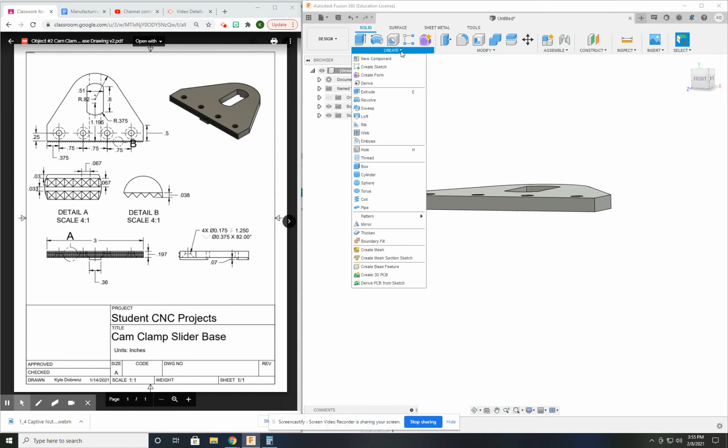I'm going to sketch on the surface and make a box. The size of that box is going to be 0.067 wide and 0.067 in length, or however you want to look at it. I'm just going to use the equals sign because that's easier.

Now I need to do an offset work plane, and it's going to be offset by essentially the height of the pyramid. The height of the pyramid is 0.038. Make sure that's going the right direction.

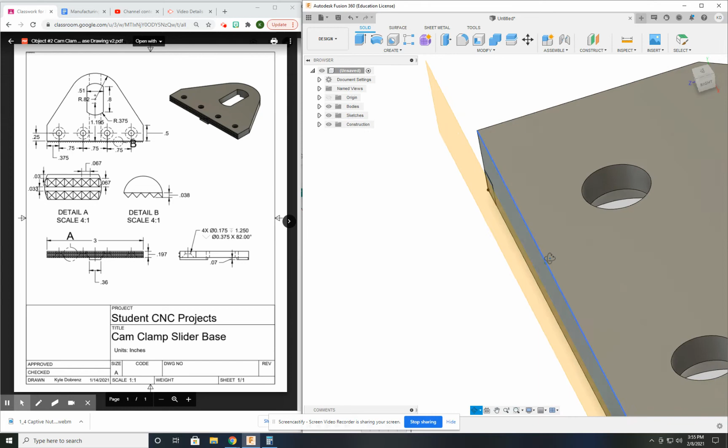Good, now I'm going to sketch on this plane I just created. I'm going to use my project tool to essentially import that geometry from the last sketch. Highlight it all, hit OK, and now it's in my current sketch.

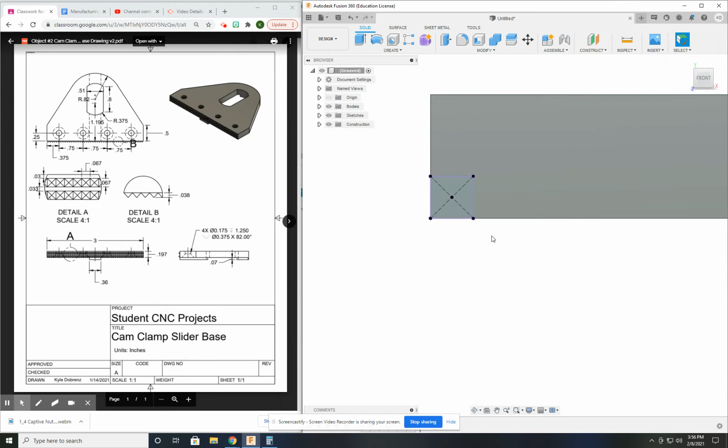I like to use diagonal lines, I'm a big fan of construction lines. Those diagonal lines show me exactly where the center point is. I'm going to put a point right there, and that point's going to be the only thing that we see in that sketch. So finish that sketch, and now I have two sketches here: this base sketch and this one.

I'm going to grab the loft tool, select my first sketch, and then select just the point in my second sketch, and I should see this neat and tidy little pyramid there. Click OK, and I have my first pyramid. Now I've got to make a lot more.

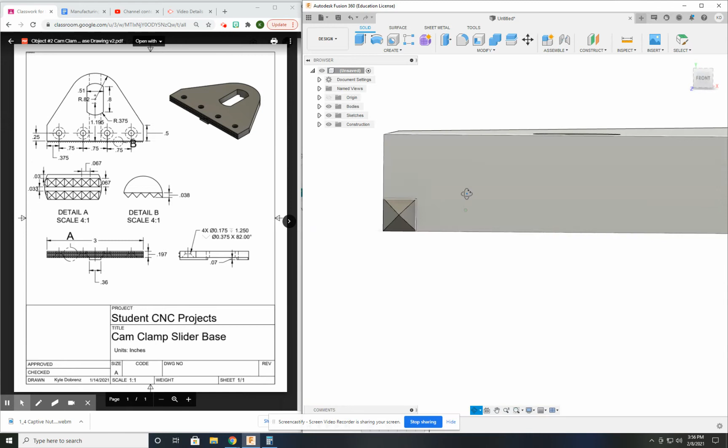I'm going to use the rectangular pattern tool, and I recommend you use features -- a lot less problems with processing when you use features. Then go down to the timeline and select that loft I made. That's the easiest way, in my opinion, to get those features.

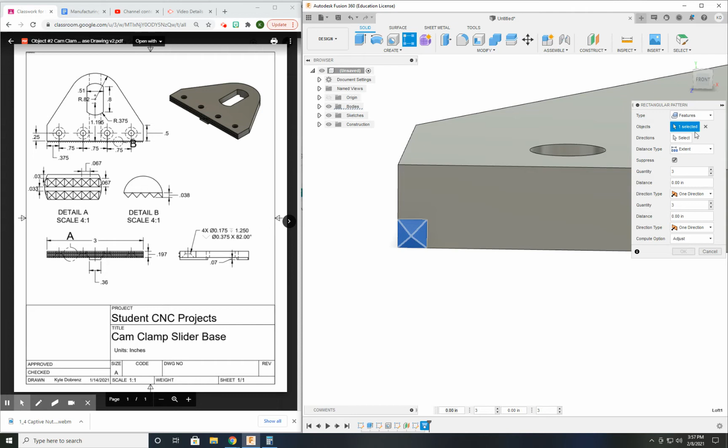Select my direction, I'm going to go that way. Let's see if I can get both directions going. Sometimes, for whatever reason, I don't know if it's a Fusion thing, but I can only get one direction to work properly. If I can get them both, we can do all of them in one step. If I can only get one direction, I'll do the horizontal and then come back with another linear pattern and do a pattern of the pattern -- copy of a copy. It all depends.

All right, so direction 1 -- I believe the number is 45, but what I'm looking for is no gaps between them.

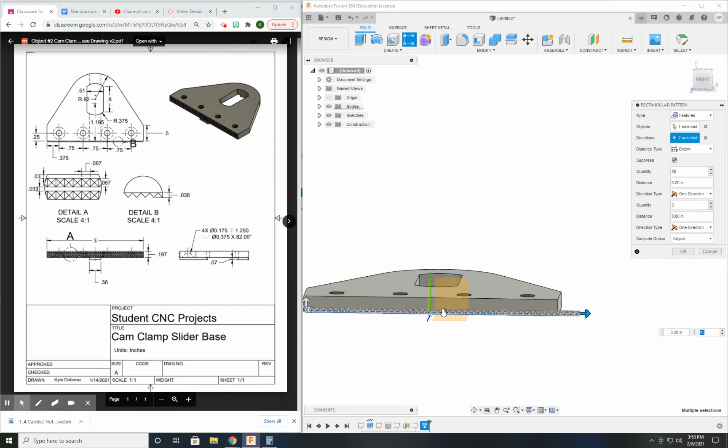Now what I put in here is the number 45, that's the quantity I have. What I'm looking for is I want the pyramids to go all the way to the edge, but without overlapping each other. So I know the width of this object is 3 inches, but I have to account for the one pyramid I've created, so if I put in 3 minus the width of the pyramid, 0.067, it should take me all the way to the edge.

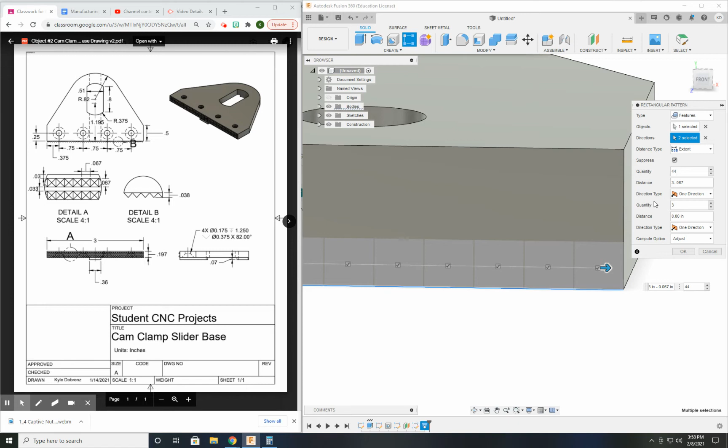I can play with numbers. If I don't know how many, I can start with 40. There's a gap there. What about 41? Still a gap. Work my way - 44, there's hardly a gap. That might be okay, but what about 45? Oh, looks perfect. I'm going to go with 45. And I just happen to know those numbers because I created the object, but who's counting?

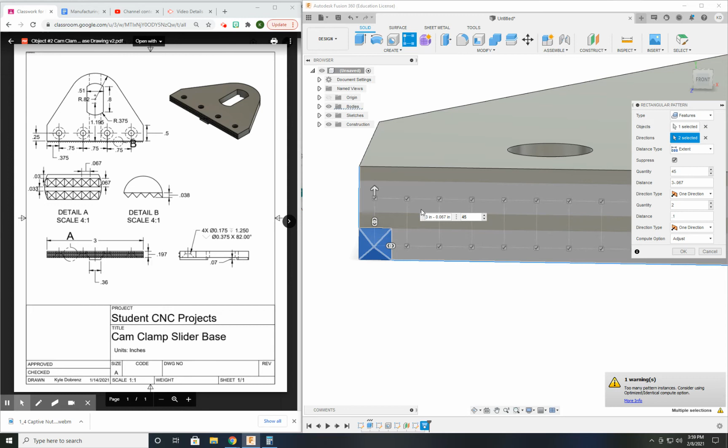It's all about using the information that we're given. Okay, now if I look here, the second row, which I think I'm going to be able to do both directions at once, the second row has a gap of 0.033, and I know that the height of this is 0.067. Add them together and you get 0.1. So let's see what 0.1 does. Looks good, except there are too many. I have 3 rows, I only need 2. That looks perfect. All right, let's see if this computer will do it.

I'm getting a warning here, too much stuff going on, but let's try it. Hey, that looks right about perfect. Very happy with that - no gaps in between, while no overlap or no discernible overlap. That's going to grip some wood, that's for sure.

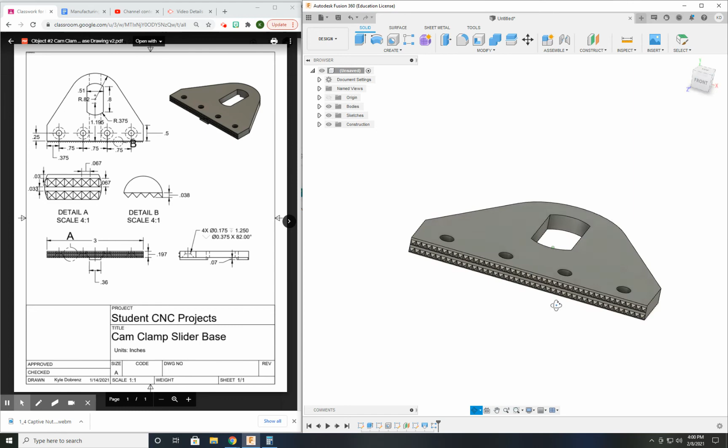All right, so that's your linear pattern tool. Now, like I said, sometimes if you can only create one row, then that's fine. You can do a second pattern tool, and when you select features, click both of these because you want the first box and the other 44 in your pattern, and you just do it a little higher. But it's great when everything works right and you can get them in one.

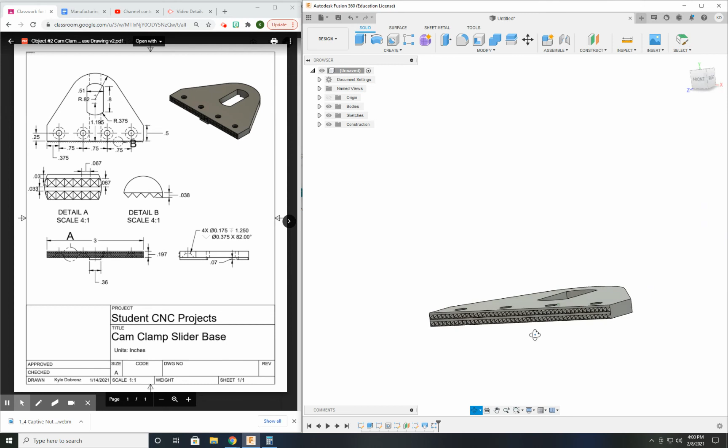All right, the last thing I have to do is create this spline type of thing right here. So let's do another sketch on the bottom. And if I look here, straight lines going all the way through, so I think I'm going to project that body, create some lines. And those lines seem to go all the way through from edge to edge. So that's what I'm going to do.

And what else do I know here? So I know they go edge to edge. Obviously, they don't run through the slot, but they're directly on either side. So what's the width of this thing? 0.36 inches, and it is centered, so I need to account for that - 0.36. So how about some construction lines to make this even? A lot of ways to do it, but that's just the way I might do it.

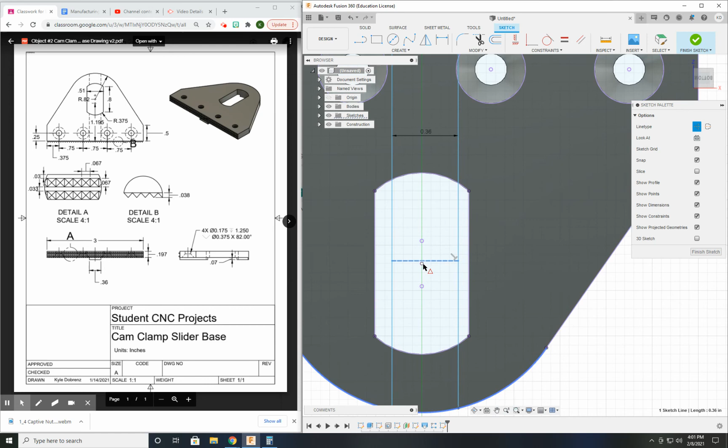Now let's see here, I put one perpendicular in there. Let's put another one in there, perpendicular. Is it going to put it? Not. Okay, I think one was probably enough to have the same effect. Let's do a midpoint - so it's midpoint, that point, at that line. Hey, look at that, fully constrained.

Awesome, now let's extrude it and see if it does what we want. Oop, not that, I want that. And by projecting the body, it allows me to just select those two. And how tall is this? This is 0.07 inches, not very tall.

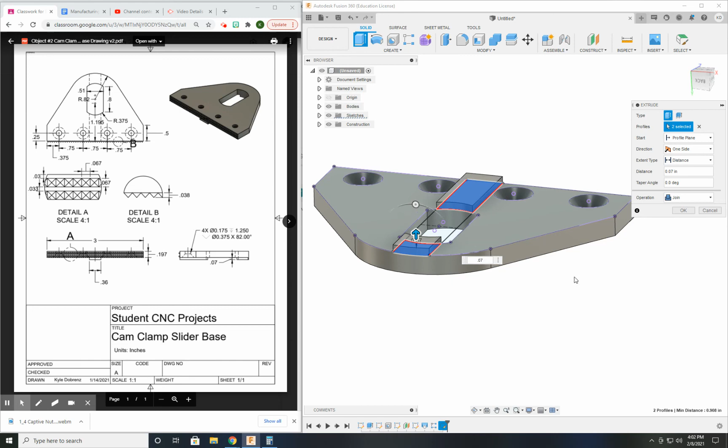Preview looks good, looks very symmetrical. Oh, that looks pretty good, I'm happy with that. So let's stick it in the isometric view and compare. Does this look the same as this isometric view? I will say it does. I'm happy with that, that looks good.

Now remember, you may have approached some of these problems a little bit different than I have. As long as you get the same result, that's what matters. I would also say your time matters as well, so as long as the alternate solution you took didn't take too long, then that's acceptable. If you went and created each of those pyramids by hand, then that probably took a long time, and you would want to not do that in the future and use the pattern tool. But if you get the end result, then generally that's okay.